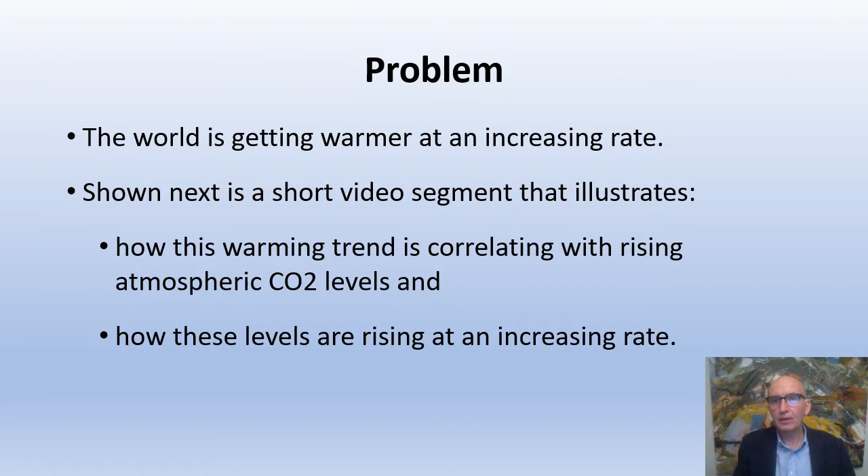The world is getting warmer at an increasing rate. Shown next is a short video segment that illustrates how the warming trend is correlating with rising atmospheric CO2 levels, and that these levels are continuing to rise at an increasing rate.

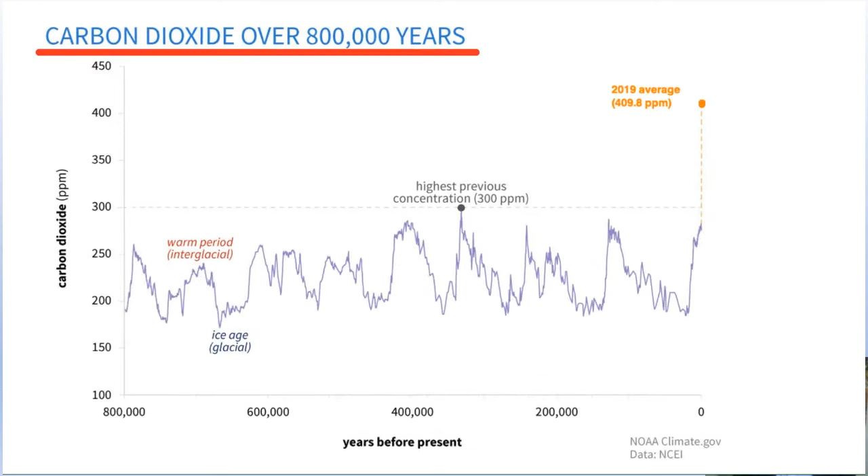The world is getting warmer and at an increasing rate. A large reason for this is CO2 levels in the atmosphere. Since the beginning of the Industrial Revolution, they have risen at an unprecedented rate. Rising CO2 levels have been correlating closely with rising global temperatures since 1880.

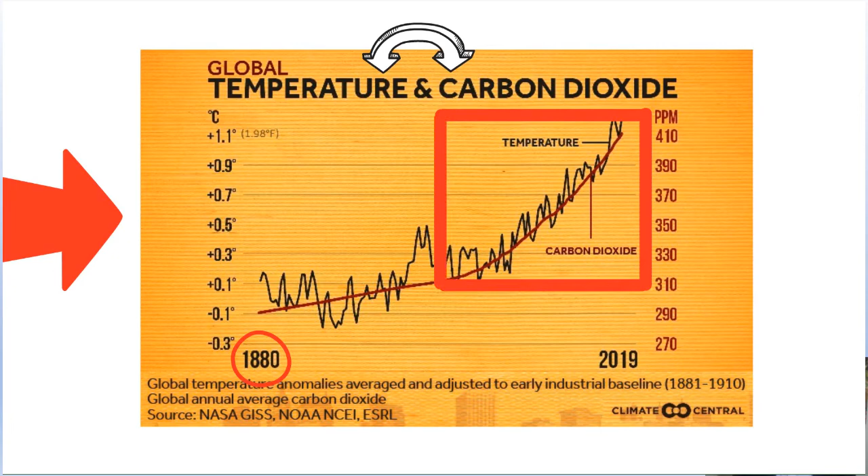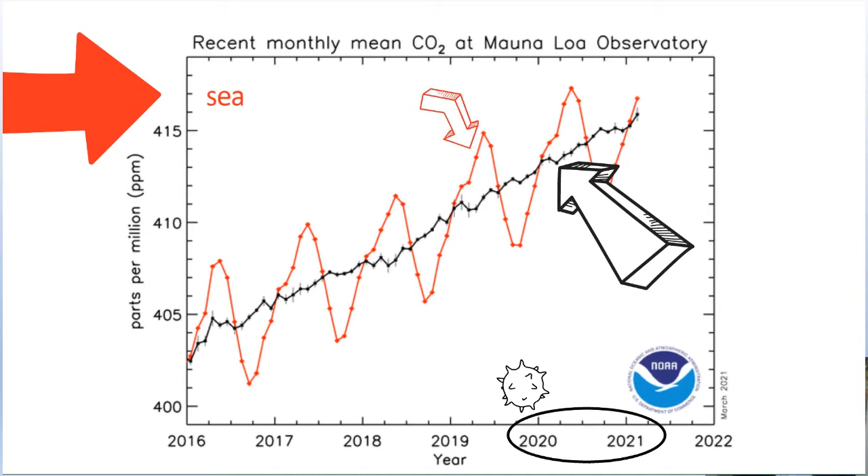Why are these CO2 levels continuing to rise at an increasing rate? There are several factors contributing to this, but the main reason is that total overall global energy demand appears to be increasing faster than the renewable energy generation growth rate. Therefore, carbon emissions need to be mitigated on a much larger scale than what has been occurring.

In addition to expanding carbon emissions-free energy generating solutions as fast as possible, the world needs to implement carbon capture on a very large scale. Fortunately, there's been rapid progress in several complementary areas, including carbon capture by a range of technology communities. Captured CO2 can be utilized for a range of uses, including vertical farming, as well as being sequestered in the ground.

Initially, CO2 captured from these power plants would be mostly sequestered in the ground. However, once there is a reliable source of low-cost CO2 available, this CO2 can be used for many other uses, including accelerating plant growth in indoor farms, strengthening concrete building materials, and production of carbonated beverages.

There are several sequestration options for CO2 captured from power plants. This includes injecting CO2 into oil and gas fields, into basaltic formations, and into salt caverns.

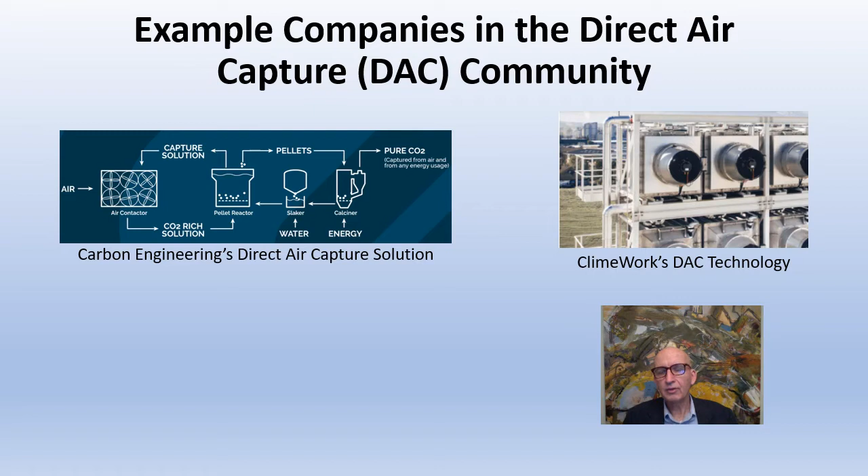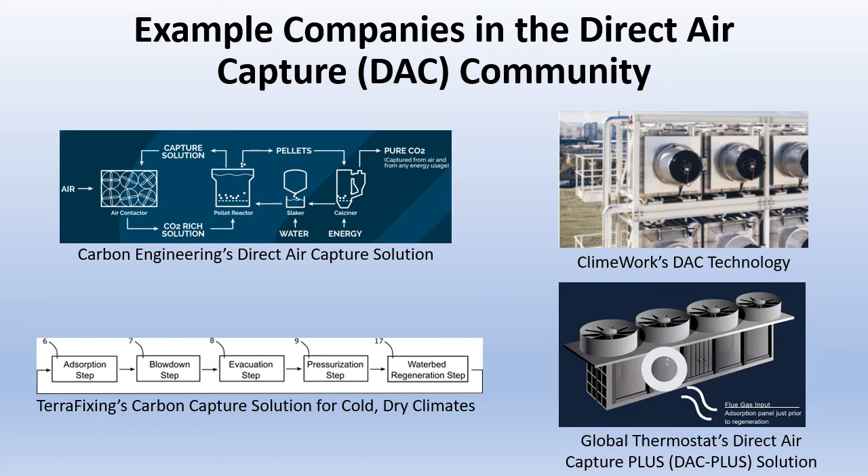Then there is Climeworks' DAC technology, which has recently commissioned the world's largest DAC system in Iceland. Next is Global Thermostat's DAC Plus solution that can capture CO2 from both the outside air and a natural gas power plant. Lastly is TerraFixing's carbon capture solution, which has developed a process that works most efficiently in cold and dry climates.

Each of these technology communities include components to help them create new as well as innovate existing products and processes. Research centers support the development of both new technologies and improving existing technologies. Business incubators and accelerators facilitate the creation of new and growth of existing companies. Some research centers include a business incubator in their facilities.

As a technology community grows, the commercial segment can become very large. For example, the renewable energy community has become very substantial and now includes many manufacturers, constructors, operators, suppliers, and trade associations.

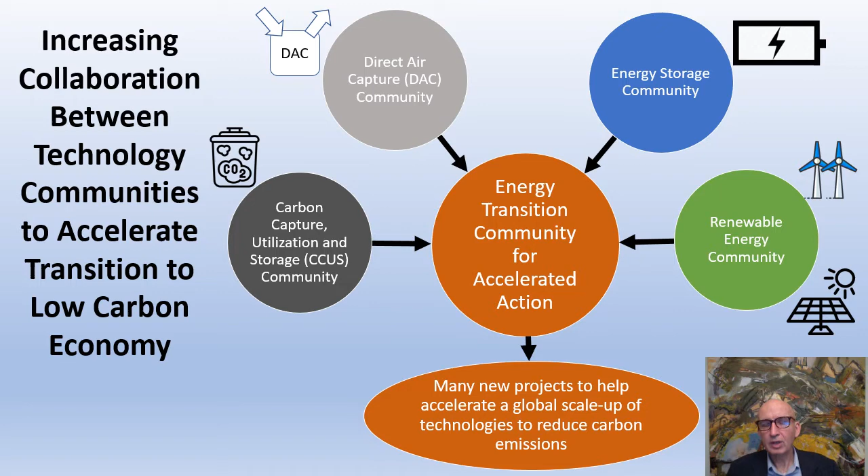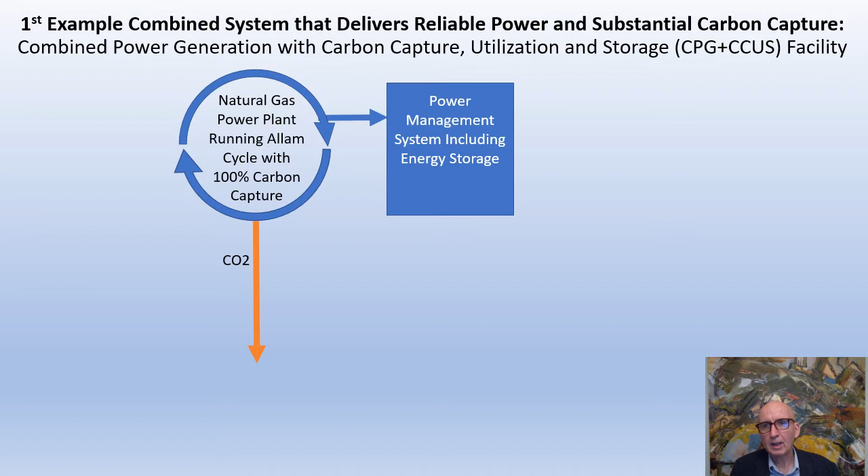This is the first example configuration. It is a combined power system that includes both a natural gas power plant and renewable energy farms. The natural gas power plant runs the Allam cycle, which enables 100% carbon capture while it delivers power to the power management system. This power management system is also supplied with electricity from wind and solar farms.

To help manage the power more effectively, this power management system includes energy storage to manage short-term power peaks or shortfalls. If a substantial amount of power is reduced for a longer period of time, such as if there is no wind for a few days, the power management system reduces the power to the direct air capture system of carbon dioxide. In this way, the power management system can maximize reliability of the power to the electric grid.

The carbon dioxide that is captured from the power plant or direct air capture system can be utilized in beneficial ways, such as accelerating growth of food in a vertical farm, or be sequestered in the ground.

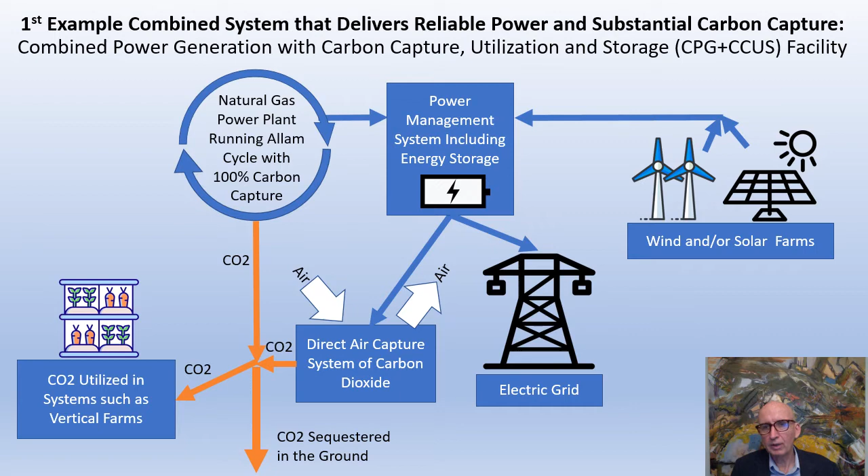Before I show the next configuration example, I will explain some more detail about Global Thermostat's DAC solution. Their basic version captures CO2 in a honeycomb contactor via their proprietary sorbent material. Then they use a low temperature process heat in the range of 80 to 95 degrees C to release the captured CO2.

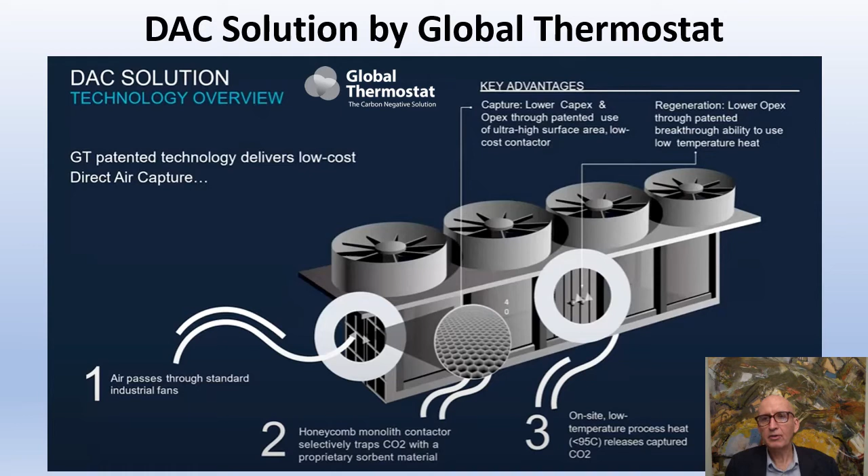The plus version of their solution, which is called DAC Plus, has a very important added feature. It can cost-effectively capture CO2 from both the outside air and a natural gas power plant. It does so in these 3 simple steps.

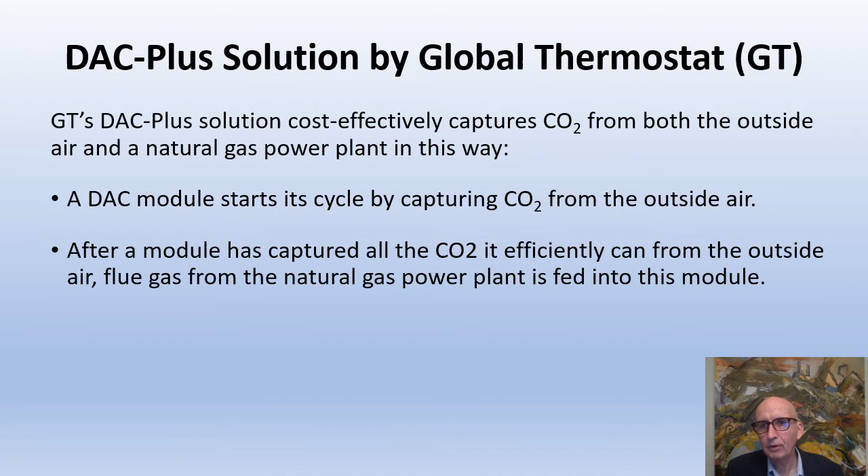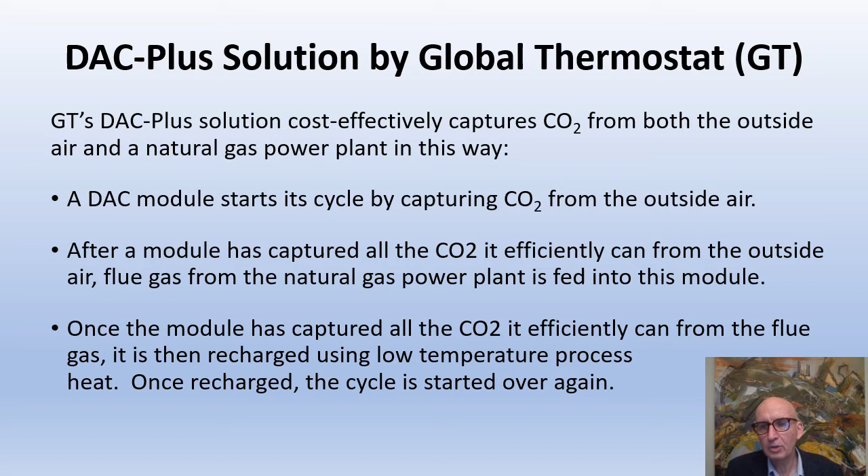First, a DAC module starts its cycle by capturing CO2 from the outside air. After this module has captured all the CO2 it efficiently can from the outside air, flue gas from the natural gas power plant is fed into this module. Once the module has captured all the CO2 it efficiently can from the flue gas, it is then recharged using low temperature process heat. Then this cycle is started over again.

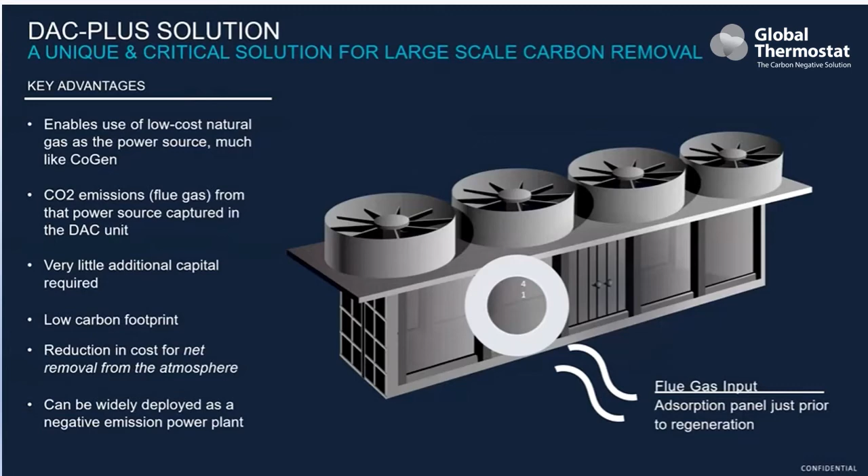Shown here is an illustration of a DAC Plus solution that includes flue gas input from a natural gas power plant. Global Thermostat indicates that very little additional capital is required to include this added carbon capture feature. The net result of this DAC Plus solution is that it can effectively capture CO2 from both the outside air and natural gas fueled energy source without the need of additional carbon capture technology such as the Allam cycle. Therefore, this solution can be widely deployed relatively quickly on a global scale as a negative emissions power plant.

This is the second example configuration. It includes a standard natural gas power plant and Global Thermostat's new innovative direct air capture plus system that can cost-effectively capture CO2 from both the outside air and a natural gas power plant. All the remaining components in this schematic work in the same way as indicated in the previous slide.

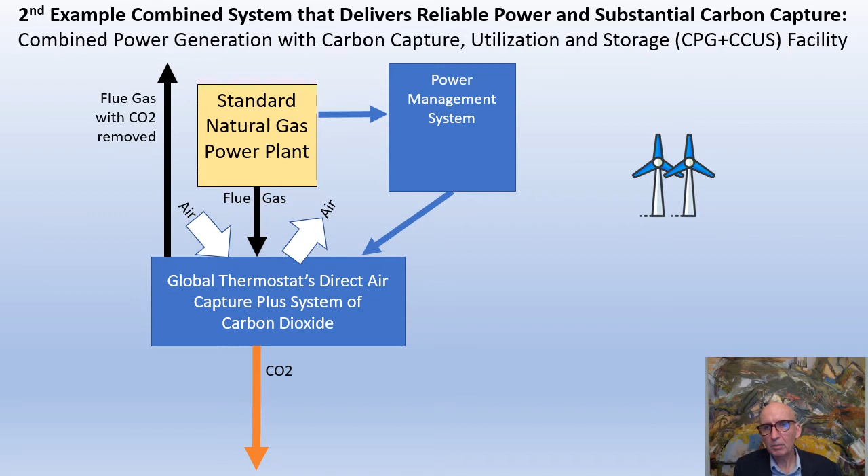One of the substantial benefits of this combination of technologies is that it can be implemented with an existing natural gas power plant. This can increase the utilization of this existing power plant and turn it into a negative emissions facility.

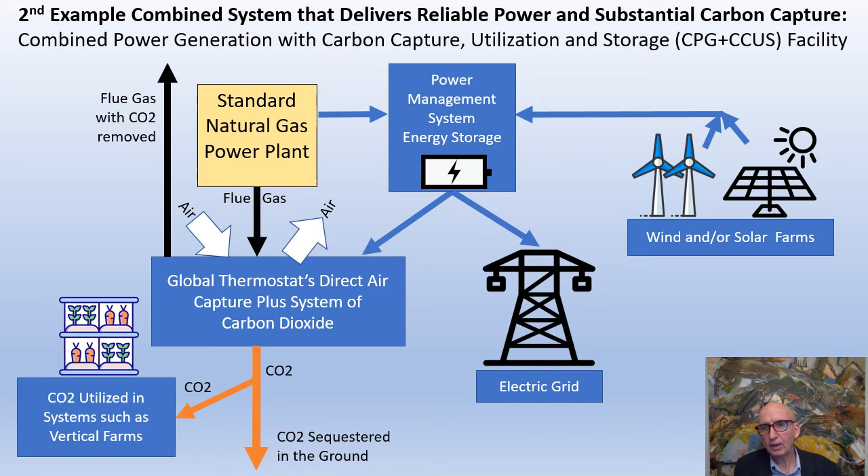To accelerate the development of a range of carbon capture technologies and enable a larger pool of people to become knowledgeable about these types of technologies, demonstration projects utilizing these types of technologies could be implemented in major CCUS clusters, such as the Alberta Carbon Trunk Line in Alberta, the Net Zero Teesside in the UK, or the Carbon Safe project in North Dakota. To view a more comprehensive list of these types of clusters around the world, you can view the Global Status of CCS 2020 report by the Global CCS Institute.

Most, if not all, industrial clusters welcome new participants to utilize the CO2 infrastructure. Therefore, industrial clusters can be good locations to build a facility that includes direct air capture technology.

There are many organizations around the world working on CCUS issues, including technology development. This includes the Global CCS Institute, the IEA Greenhouse Gas R&D Program, and the National Carbon Capture Center in the US. As a result, there are many specialists who can be invited to help develop and evaluate demonstration projects located in CCUS clusters that could combine industrial capture technologies with direct air capture technologies and renewable energy farms as outlined earlier.

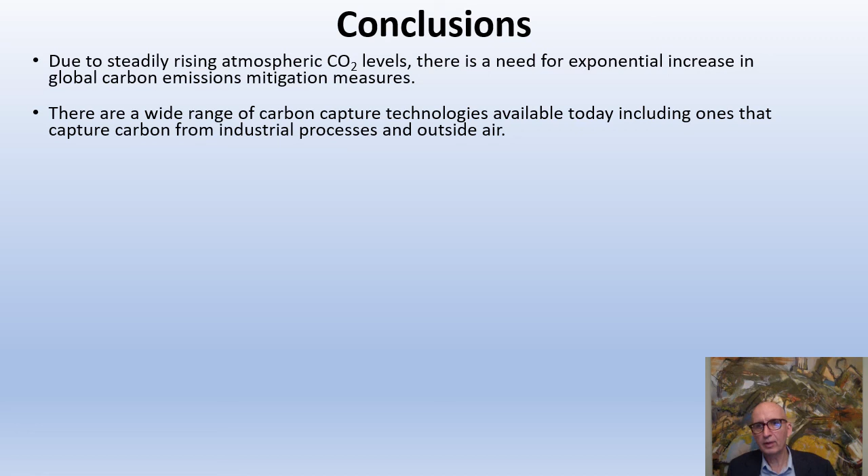In conclusion, due to the steadily rising atmospheric CO2 levels, there is a need for exponential increase in global carbon emission mitigation measures. There are a wide range of carbon capture technologies available today, including ones that capture carbon from industrial processes and the outside air. Global Thermostat's technology can capture from both a natural gas power plant and from the outside air. Therefore, this solution can be widely deployed around the world relatively quickly as a negative emissions power plant.

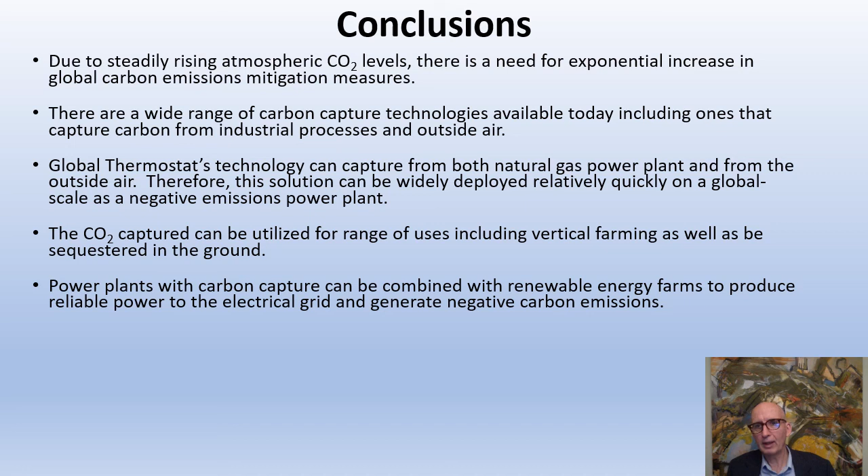CO2 capture can be utilized for a range of uses, including vertical farming as well as being sequestered in the ground. Power plants with carbon capture can be combined with renewable energy farms to produce reliable power for the electric grid and generate negative carbon emissions.

This solution can be financed on a global scale with green bonds purchased by firms that have joined the Glasgow Financial Alliance for Net Zero, which have a combined total of over $130 trillion under management. This solution helps governments, companies, and workers that depend on income from fossil fuels to transition to a low-carbon economy, which is critical for their support.

To help catalyze the implementation of this opportunity on a global scale, we recommend the following. First, leverage the expertise of CCUS and DAC specialists along with the resources of CCUS clusters to help accelerate the development and implementation of combined power plants with carbon capture on a global scale. Next, invite independent groups such as Drawdown and the Center for Climate and Energy Solutions to work together to estimate the full impact of implementing this opportunity.

Thirdly, inform companies in the oil, gas, power plant, solar energy, wind energy, and energy storage sectors about this opportunity, which can bring them many billions of dollars in funding. Fourth, inform financial institutions that facilitate issuance of green bonds of this opportunity, which will likely enable them to generate hundreds of millions of dollars in fees doing this work.

Lastly, respond to the recently published concerns about carbon capture, utilization, and storage by 500 organizations to help build broad-based support to implement this opportunity on a global scale.